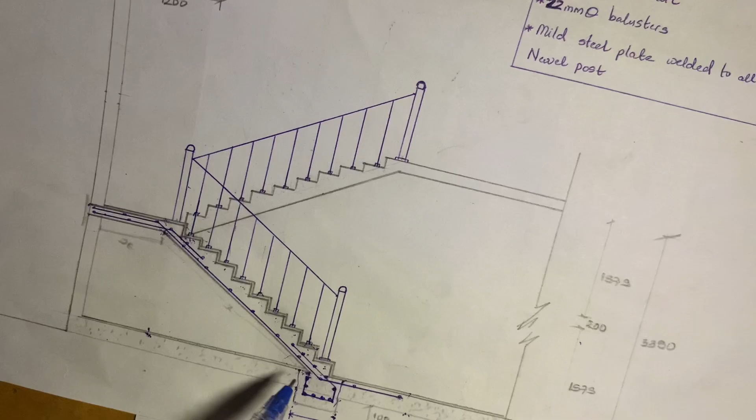So the first thing we're going to be measuring for would be the formwork for the waist. So if you look at this diagram, that's this section, you know that we've calculated for the length of our string. So now we're going to be needing a length of wood or form that would cover this string or this waist like this.

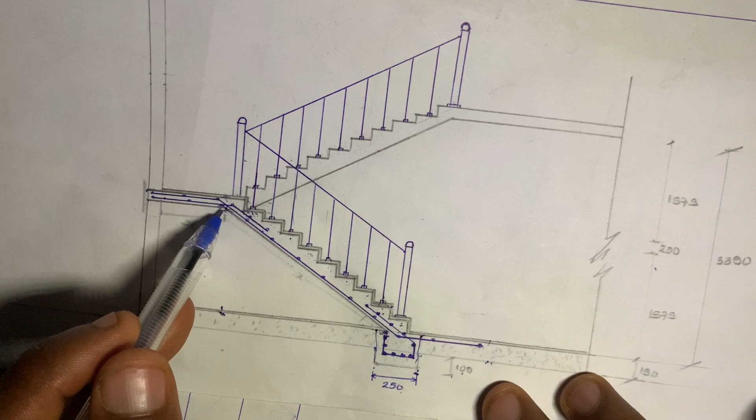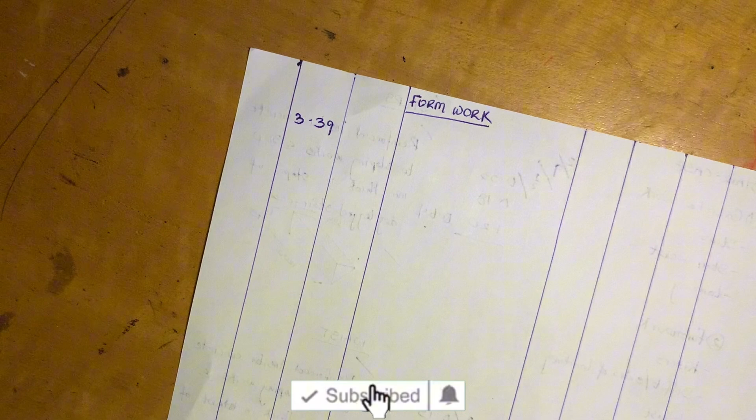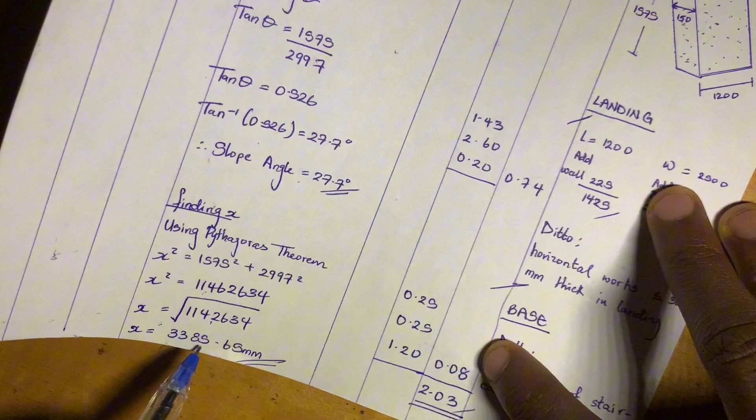So we can now use the length of our string that we've calculated as that length, because if we have a wood that can cover this whole place like this, it will prevent concrete from pouring outside. So what we can now say is 3.39, which is the length of the string that we've calculated for, which is this x. We calculated it as 3,385, which is 3.39 in meters. So 3.39 would be the calculation.

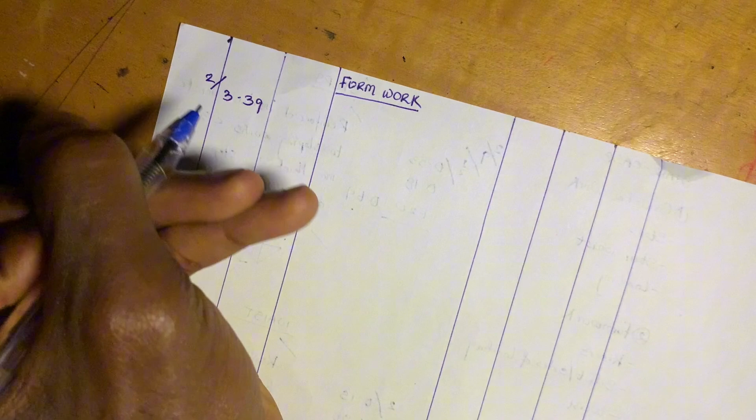So since 3.39 is the length of our string in one flight, that means we're going to be needing as much as this length of formwork for the two flights, because they are the same length. So you multiply it by 2. So when you multiply this by 2, you are going to be having 6.78.

So you describe plain formwork to the sides of stair waists. And then you close. So after doing this, you measure for the formwork for the sides of the stair waists. Next you are going to be measuring for would be for the risers.

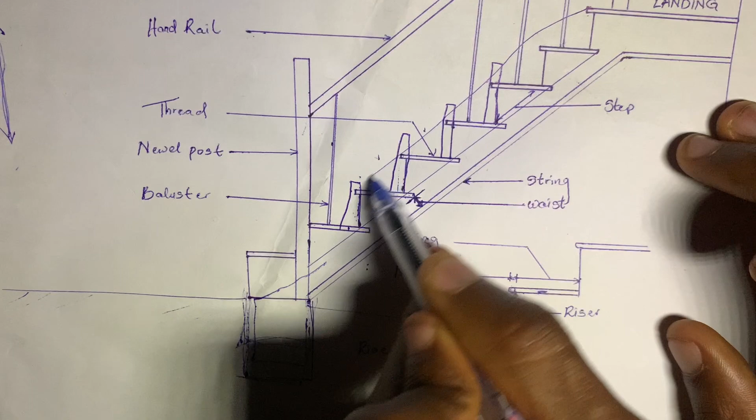So if you look at this drawing, for example, there will be formwork like this, to give support to the concrete pouring into this part. So it means that here like this would be covered. That's the formwork for the waist that we just measured for. It will be covered like this. Here like this will be covered. Now inside there will be another form for the risers. So now that is measured in linear meter.

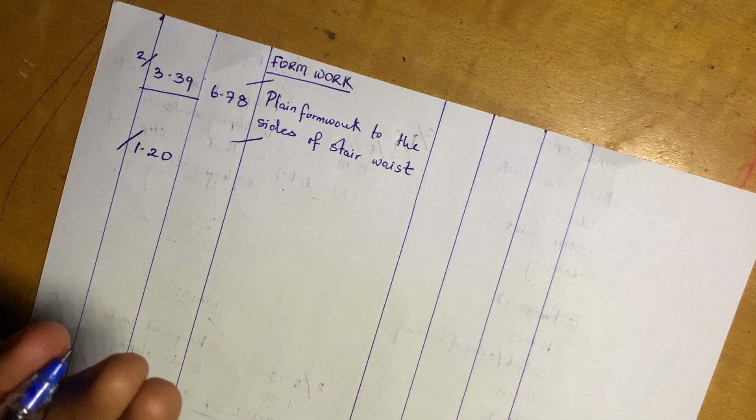So in order to calculate for that riser, all you need to do now is to get the width of your staircase, which in this case is 1,200. So those forms for the riser will be as long as the width of the staircase, which is 1,200. So you book 1.20 for 1, but we have 9 steps, meaning that we are going to be having 9 risers. So you multiply it by 9. So if there are 9 risers in one flight and we have 2 flights of 9 risers, we multiply it by 2.

And doing that we are going to be having 21.60. So we describe ditto because it's the same operation, plain formwork, staircase risers, and then you close. Doing that, you measure for the formwork for the risers. The next one we are going to be measuring for now would be for the sides and for the soffit of the landing.

Now, if you look at this drawing, I said that the landing is going to protrude into this wall, so we're going to be needing a form to cover this part outside so that the concrete will not be pouring outside. Secondly, we're going to be needing form that will be covering this middle part here, which in this case is giving us 100.

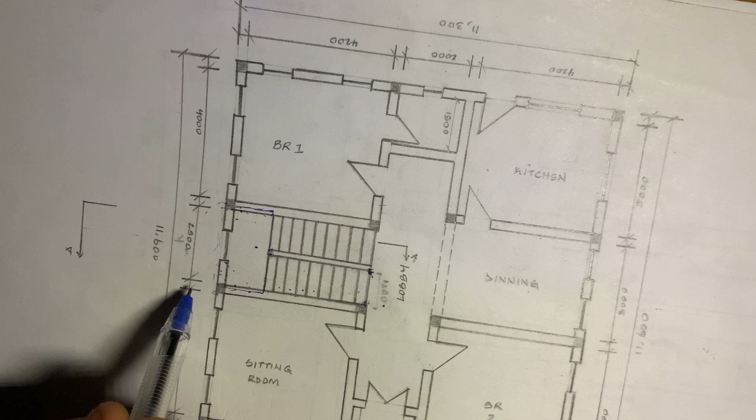So once we cover this side, and then we cover this part of the landing that is going to be showing, that means we've covered for all the sides of the landing. So we're going to be covering for the external side, this little side, and this part of the landing that will be exposed. So we are going to be starting with this part. So we know that the length that we calculated here is 2.6.

Initially it was 2.5 meters, but we added extra because it's protruded into the wall. We added extra 50 on both sides. That will give us 2.6. So now from that 2.6 we need a formwork that is going to exceed that 2.6 so that it can be nailed to the wall. It cannot be nailed on just this space like that. It will not be able, it needs to be more. So 2.6, we're going to be adding extra 50 on both sides. That will make it 2.7. So for that side we'll be having 2.7, and then we'll close.

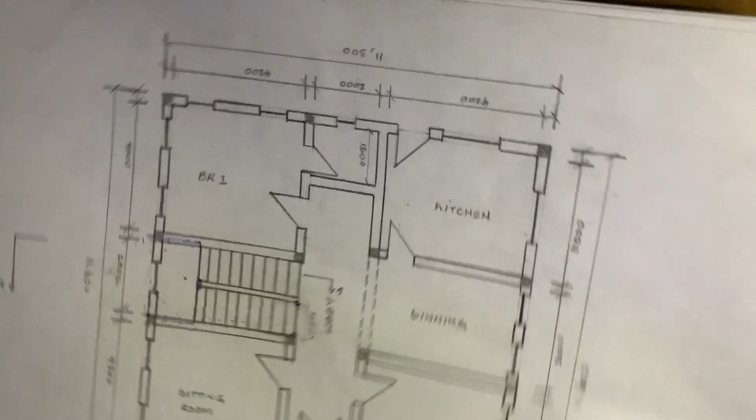Now the next part we're going to be having would be this little space here, which the dimension is 100 mm. So we're going to book 0.10 and then we close. So the next part we're going to be booking for would be this side here, from here to here. We need to cover it with formwork so that the concrete poured on the landing will not start pouring on these steps.

So to measure that part, we are going to be using the width, because if from here to here is 1200, that means here to here is the same as 1200. So we'll book 1.20 and then you close. Doing this, you measure for the sides of your landing. So the last thing we're going to be measuring for now would be the soffit of the landing.

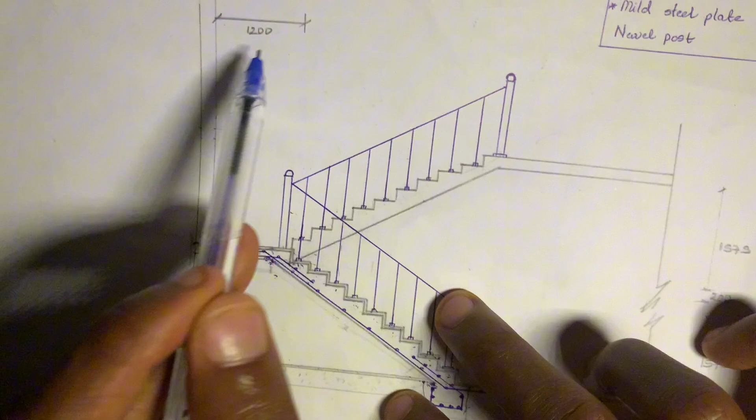So now you take your section. This is the soffit of your landing. Now they've not given us the length of this soffit. However, we have 1200 as the top dimension of your landing, but this dimension from here to here is lower than this 1200 that they've given us. So how do we find the dimension from here to here? We know that from here to here would be the dimension of our tread. So this part is as long as our tread, which is 333.

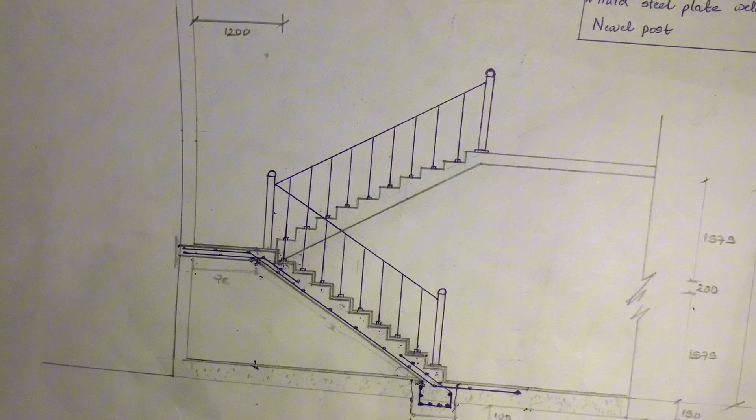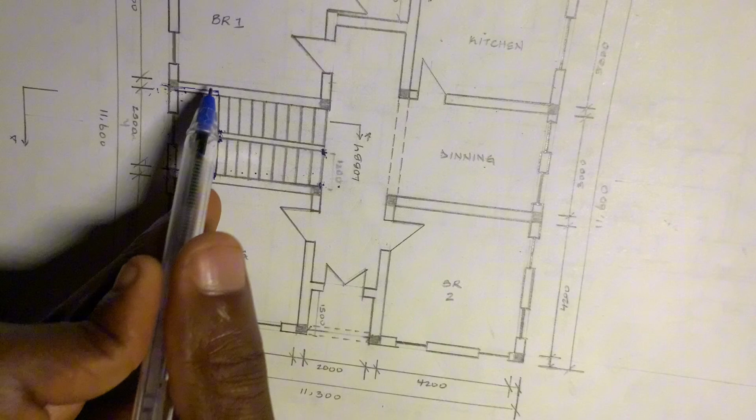So if we minus 333 from 1200, whatever we get would be our x, that's this part for our landing. So 1200 minus 333 would become 867. So we have one parameter, 867. I told you that the surface is measured in meters square. So if you have 867, then the next parameter would be the width of the landing, which would be from here to inside here. That's in to in, because the formwork will not enter into the wall. It will stop at the edge of the wall, and they've given us that parameter as 2,500.

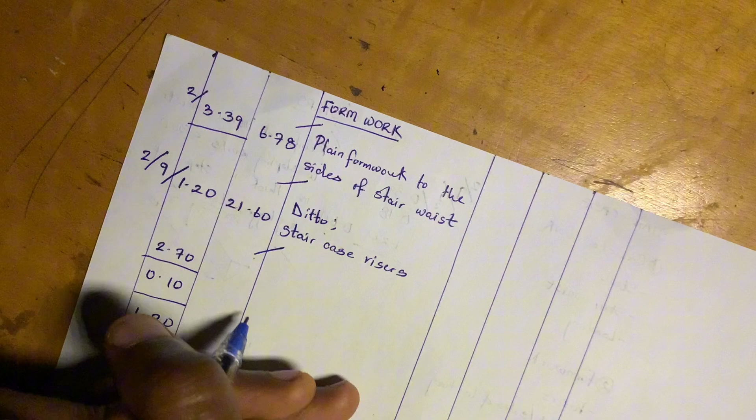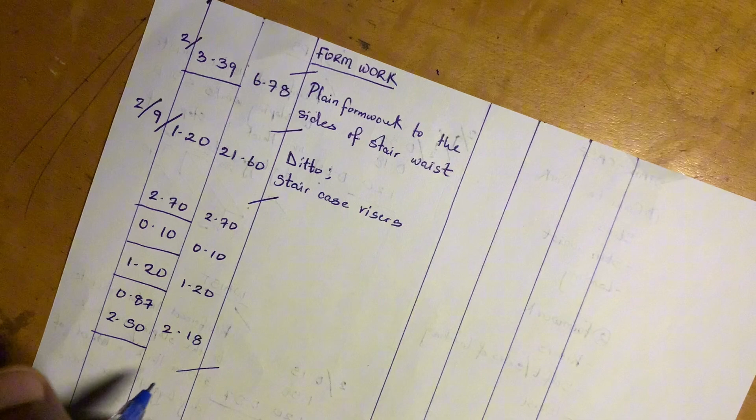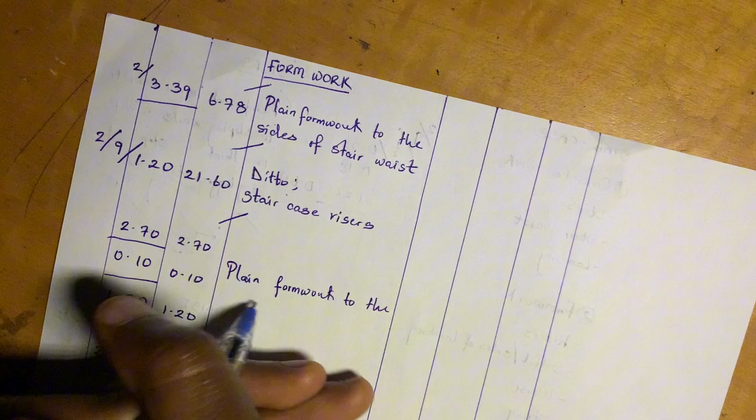So we'll now book 0.87 by 2.50, and then you close. So this will be 2.70, this will be 0.10, this will be 1.20, and if you do the operation for this, 0.87 times 2.50 will now be equal to 2.18, and then you close. So you've described plain formwork to the side and soffit of the landing.

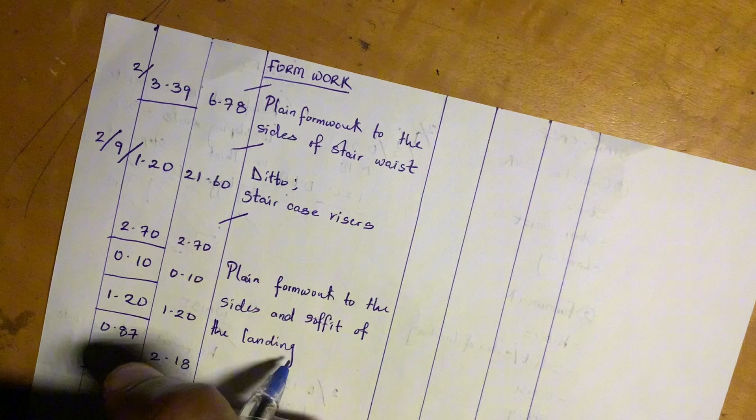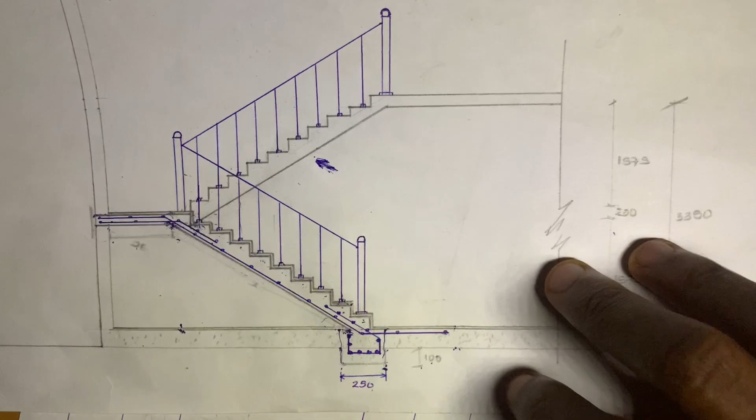So the next thing we're going to be booking for would be the formwork that we laid underneath the string. That's the soffit of the staircase. There has to be formwork under so that concrete will not pour out. So to measure for that, we are going to be needing the width of the staircase, which is this 1,200, then by the length of the string, that's the sloping side of the staircase. So we're going to be needing this parameter, which is x, and then we're going to be needing the width of the staircase.

So now we know that we've calculated our x. We calculated our x as 3,385.65, approximately 3.39. So it will now become 3.39 by 1.20. So we can now describe ditto soffit of staircase waist. So if you do this operation, 3.39 times 1.20, it will give me 4.07, and then we multiply it by 2. Why are we multiplying it by 2?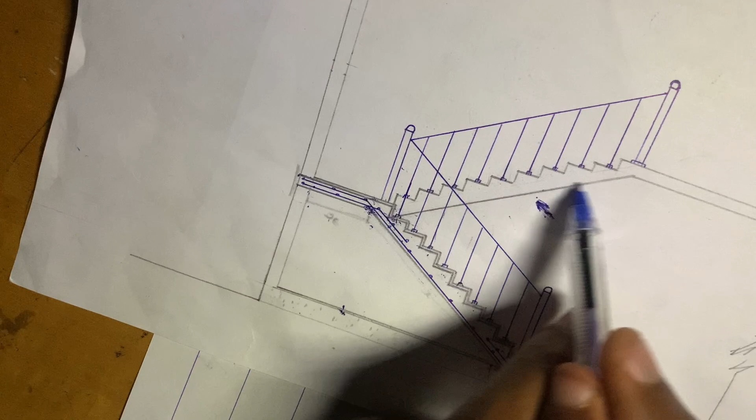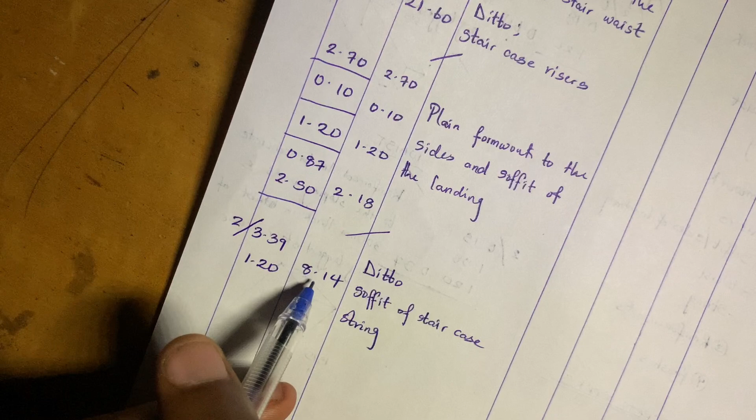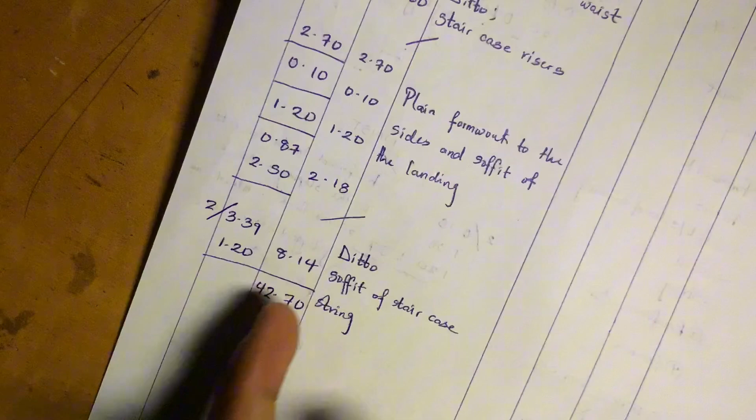I'm multiplying it by 2 because the size of formwork we are going to be laying in the first flight will be the same size of formwork we are going to be laying on the second flight, because the dimensions are the same. So 3.39 times 1.20 times 2 will give me 8.14, and then I close. So when I add everything together, the total quantity would be 42.70. So this will be the total quantity of formwork that we're going to be needing to construct that particular dog leg staircase. So we've come to the end of today's video, guys.